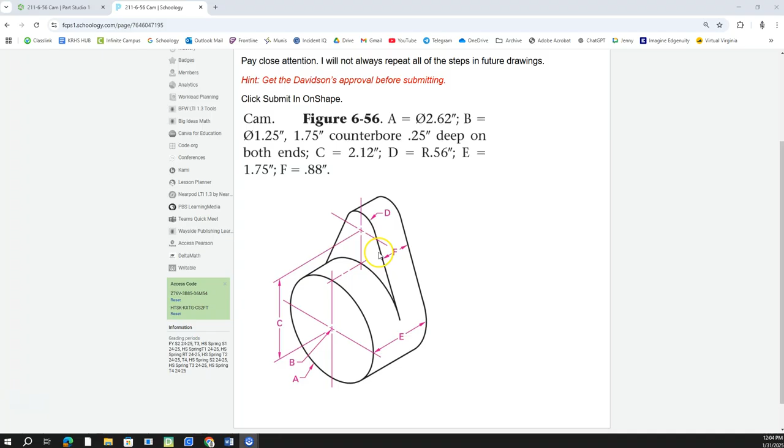Open that up in Schoology if you need to see it again. I'm going to go ahead and turn those two off. Right click on this, click New Sketch, View Normal To, and I'll turn that plane off also.

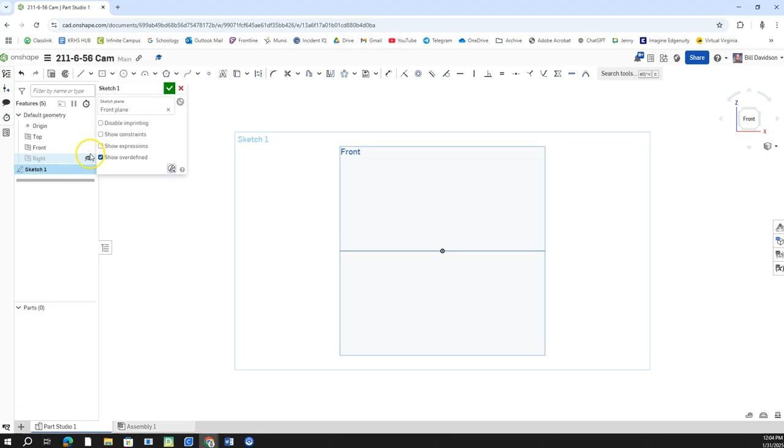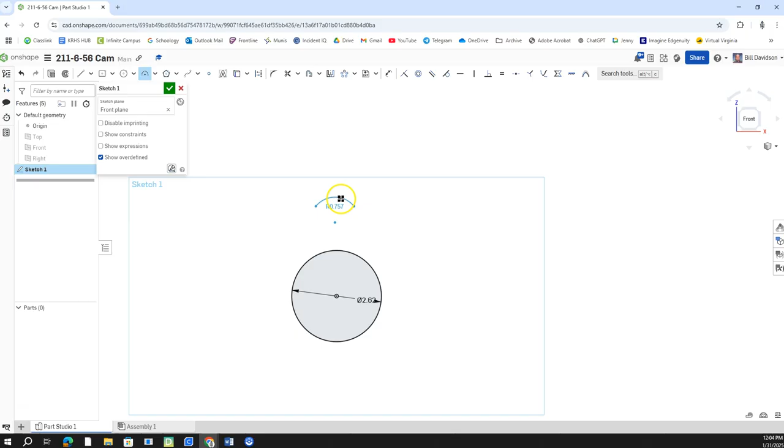So now I'm going to start by clicking on a circle. I'll put a circle here and make that 2.62. Then I'm going to draw an arc up here somewhere, like this. That's fine, something like that.

You don't want to draw it so that this is in line with this, because it does an automatic constraint that throws things off. I haven't given it to anybody, so I should be fine.

So I'm going to do a tangent constraint between here and here, between here and here. I'm going to do a vertical constraint from here up to here.

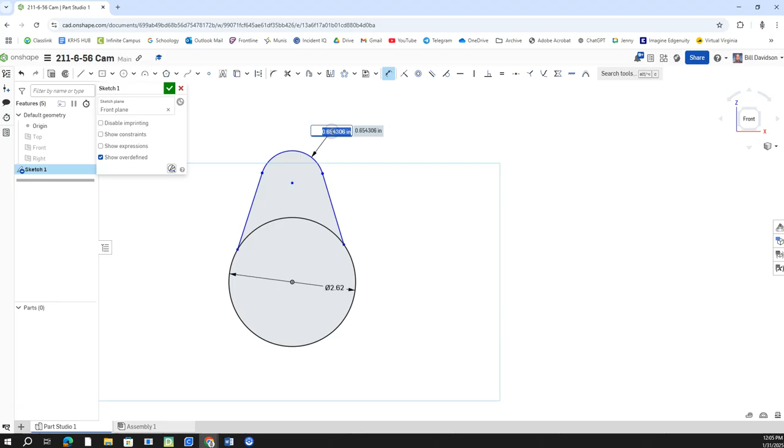All right, I'm ready to start dimensioning some stuff. I'm going to put a dimension of 0.56. And I need to do a dimension between the center points. So that right there was 2.12.

I didn't do the tangents on the side here, so let me do that real quick. Tangent here—I hope you did it already. That's good. If you didn't, do it now.

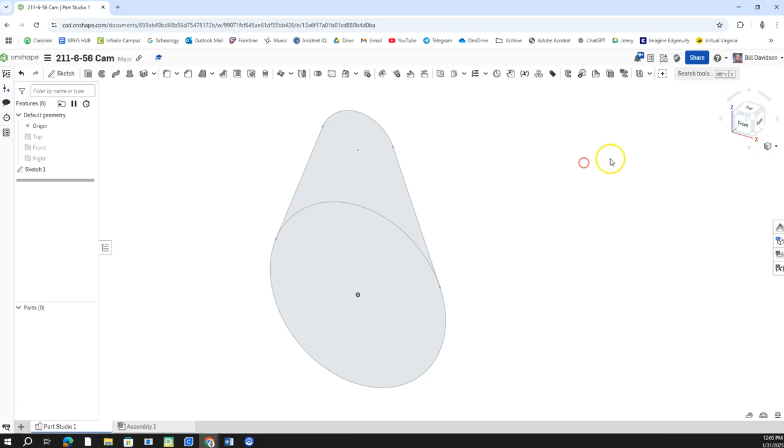All right, I'm going to finish that sketch, and we're going to end up sharing that sketch and using it again. But for right now, I'm just going to click Extrude, and that goes out E, which was 1.75. And I'll finish that sketch.

Now I'm going to check this right here. All right, so it comes back on so I can see it. And then make that come out, and that was 0.88. So the 0.88 thickness is right there.

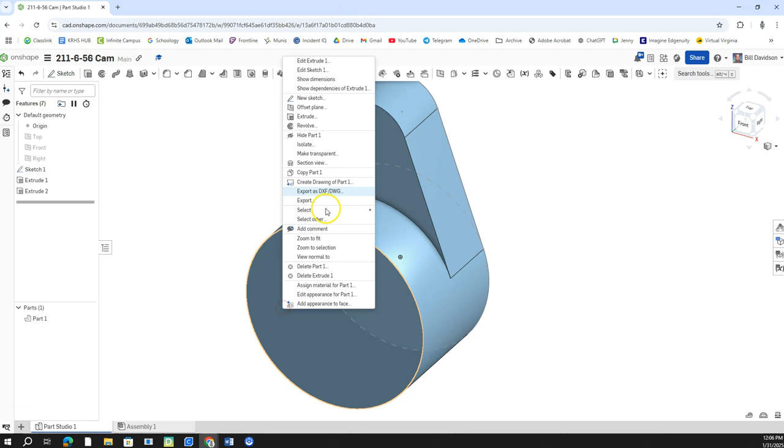Now I'm going to right-click on this surface, create a new sketch, and put this right here. I'm going to put it right on the center so it doesn't have to be constrained—it's automatically constrained.

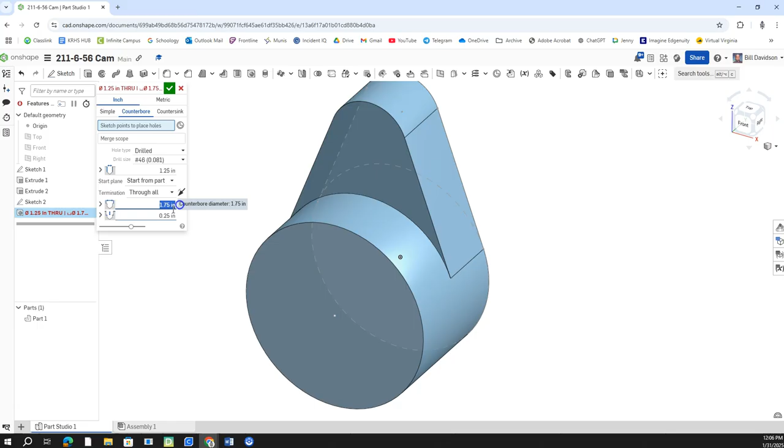Now what I'm going to do is put a hole in here. I'm going to use the counterbore, and make sure it's in inches since it's not metric. The diameter going through was 1.25, and 1.75 was the counter bore here, and the depth of that counter bore is 0.25, so those two need to be set this way. I'll click on that, and you should see it make that counter bore.

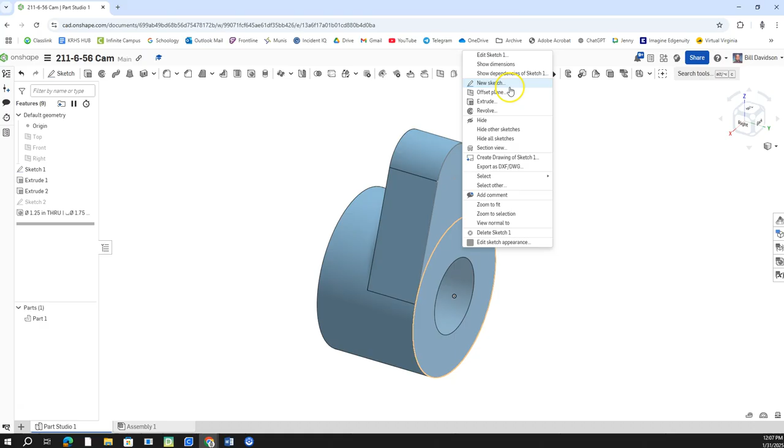All right, so I'm going to click on this for a second, and then we're going to turn the rest around the other way. I'm going to right click on the surface right here, click a new sketch, and view normal to that sketch plane.

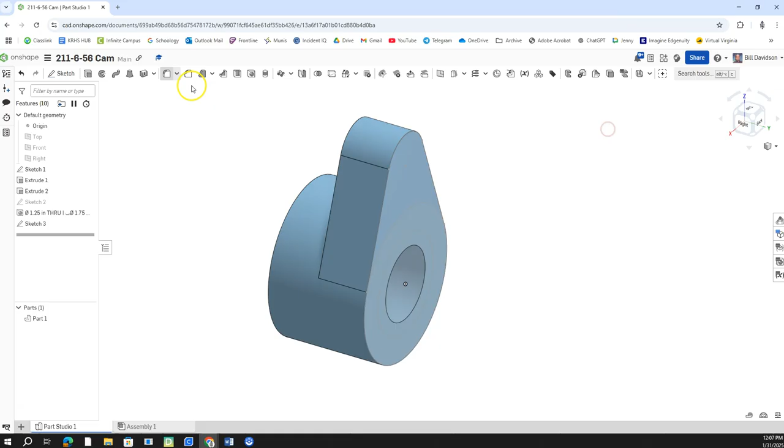I'm going to draw another circle right here on that center point, make that 1.75. So I got a 1.75 circle there, and at this point I am ready to extrude this, and I only want to do the inside part, so I'm going to do that right there.

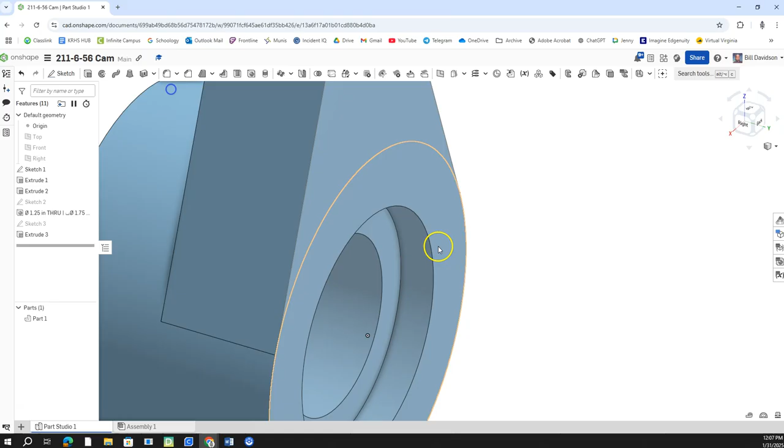I don't want to go all the way in. I only wanted to go 0.25 deep, so I'm doing this on the back side of this. 0.25 deep, and we're going to remove it. So I'm going to turn that around so it flips inside there and cuts that out, and I remove that. So this is what that part looks like.

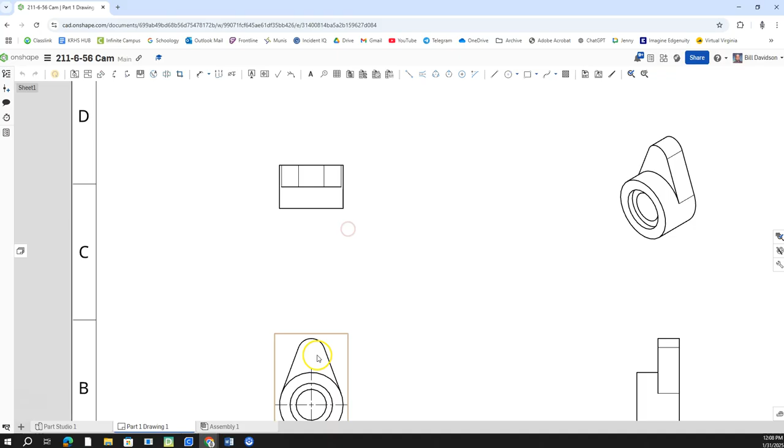Double click my mouse wheel, and I'll right click to create the drawing. Now I'm going to do ANSI B inch right there, and I'll do my standard views. Some people might say you need to lay this thing down, but in the inherent nature of this cam drawing, it looks like it belongs to be standing up, and it's the natural way you would do it. So you would maybe potentially rotate this 90 degrees sideways, but I'm okay with it being this way.

I'm going to show my hidden lines. I'm going to hide the tangent ones. I don't think there's going to be any here. Show hidden lines, hide the tangent ones. Right click, show hidden lines, hide the tangent ones.

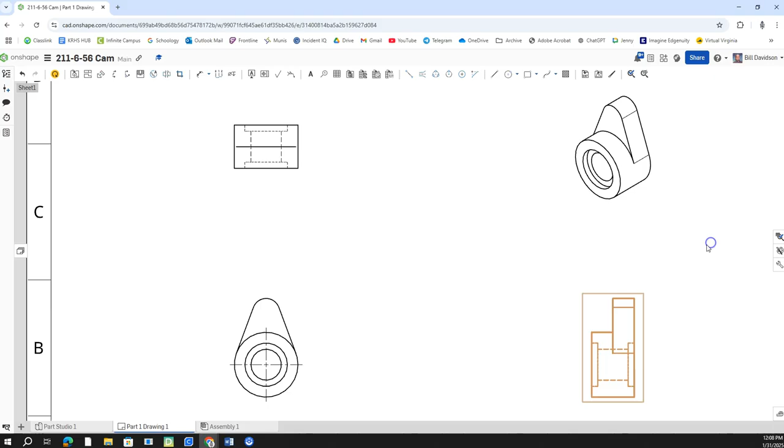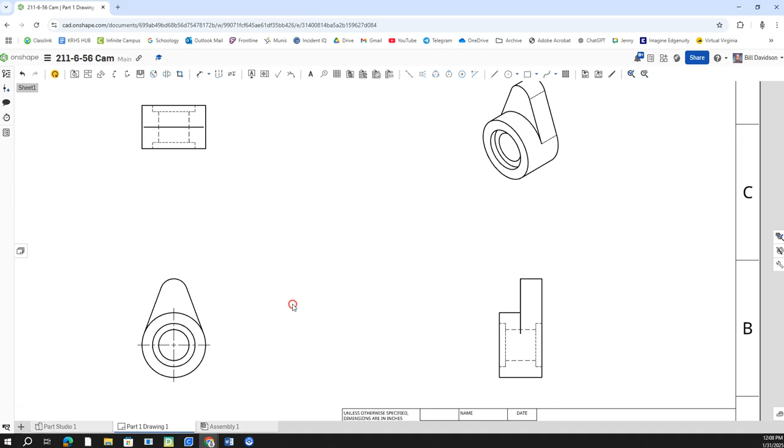So this is important because you see here that this is a tangent line, the tangent way this goes down into that. It doesn't go all the way across, and that's an important feature to have in there to make sure it's right. This one blends right in, comes down and blends in right there, so it doesn't go the whole way, but that's where it lines up. This is an important feature that if you were drawing it by hand, some people might miss. So you don't want to do that. You don't want to miss it.

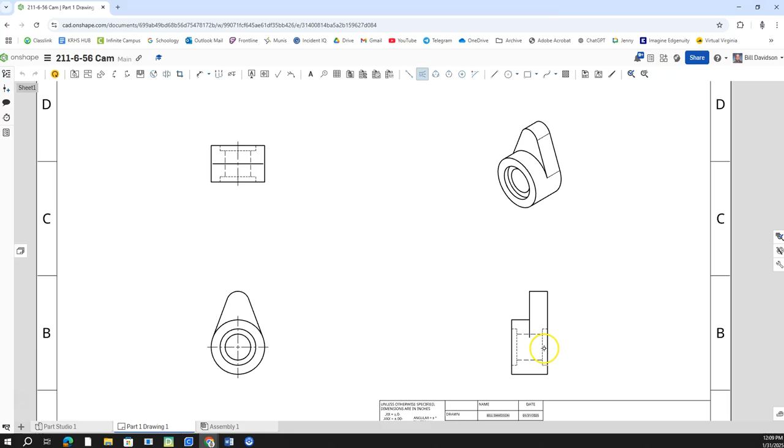So we'll click this, and I'm going to click that and that to make them. Whoa, I want to undo that little part right there. I'm going to do this to that one, and I'm going to add to this end over here. I'm also going to come over here to this one. I'm going to do that little one and this little one. I'm going to do one right between them.

So I got my center lines on there, center marks. I'll go ahead and click this diameter of that circle right there. I want to make sure that I use the hole command when I do this. Then I'll click the hole feature. Click that right there, and it tells us this.

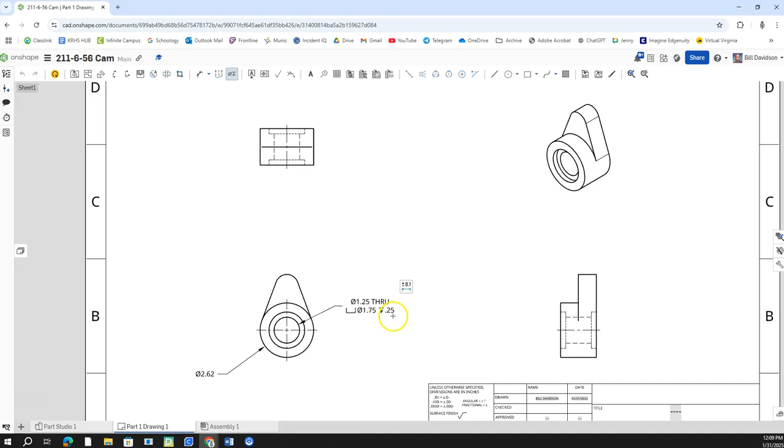And so we will. I'm actually going to change this to say both ends, like it did in the thing. So you're aware that it happens in both places. So you can see it now in the drawing that it happens that way.

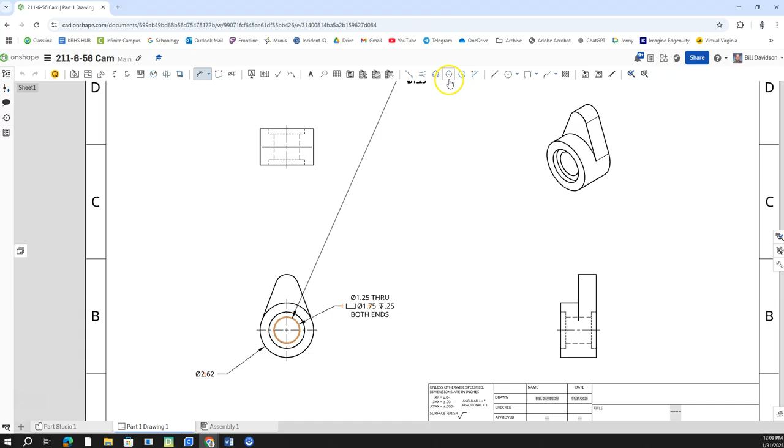All right, I'm going to put a dimension. This is from the center of this to... so now we know we're going to do a dimension that goes from the center of this to the center of this.

That, and I'm going to put a radius on here. Yes, of course it is, because I don't do freedom units. Alright, so there we got that one.

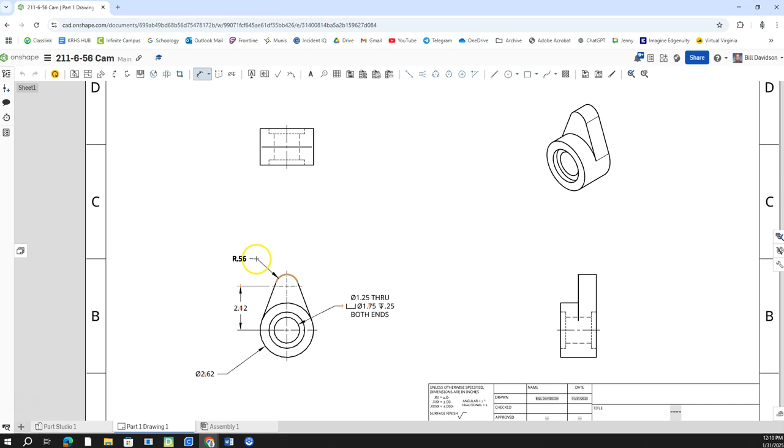The top view is nice to have. I'm just going to do all the other things here. I'll do a dimension on the bottom that tells us how thick this part is. So that's all we got on that one.

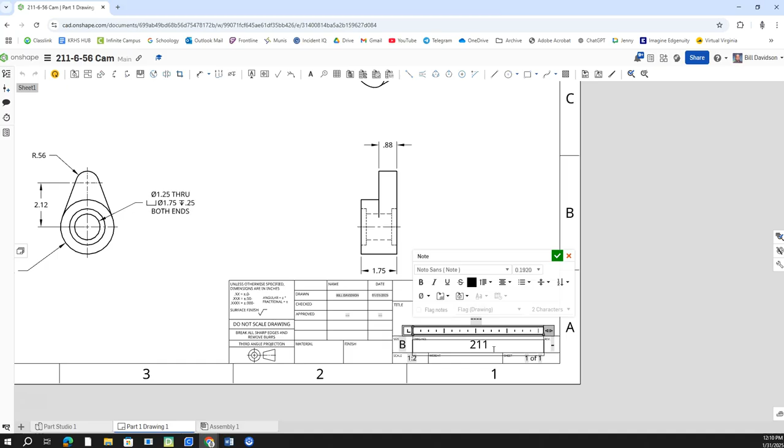Yeah, I want more of those. And then we'll call this one cam. And we'll come down here to the part number, and I'll delete that and backspace over that. Backspace over that. 211-6-56, that's our part. I'm going to double click the mouse wheel, hit submit.